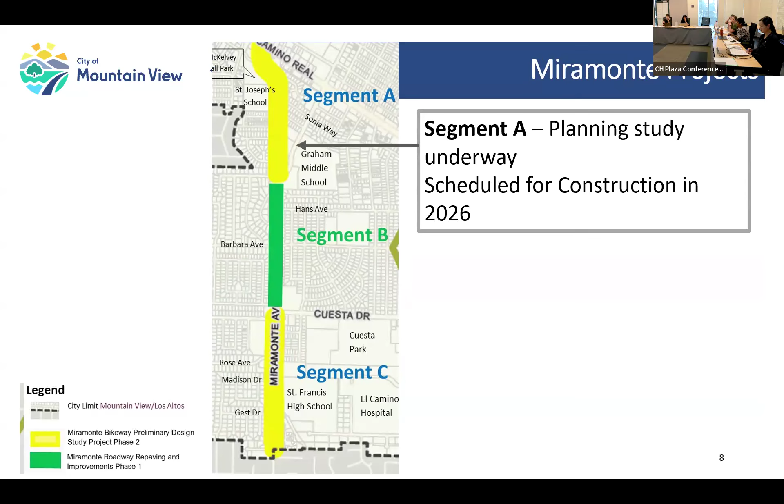As Allison mentioned, this is a planning study for segment A and segment C. We kicked off the study last fall with outreach round 1 and study data collection, which included a bike and walk audit, an interactive map survey, and an open house. Through this outreach we received valuable feedback and improvement ideas for this corridor.

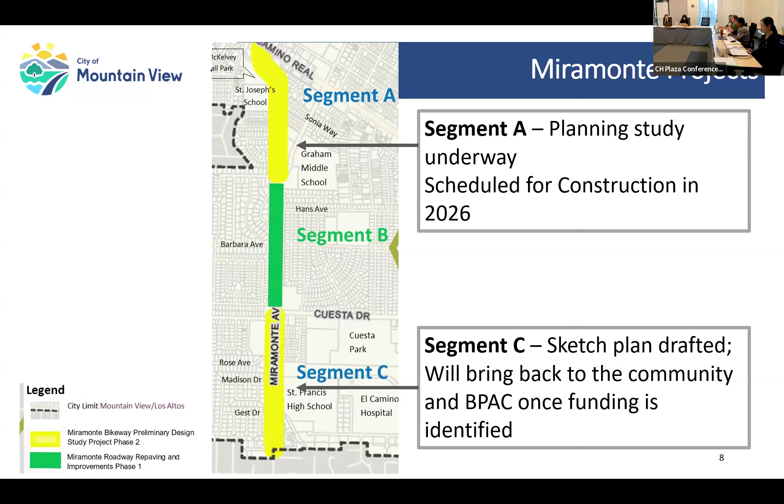In parallel, we also conducted thorough data collection, which included traffic counts, speed, traffic collisions, parking counts, and field observation. Traffic data collection and parking utilization are included in your packet as Attachment B and Attachment C.

Based on the data collection analysis, staff kicked off outreach round 2 during summer. During this round of outreach, staff sought feedback on proposed parking removal, proposed travel lane reduction, and bike and pedestrian facilities along the corridor. These elements were presented for public feedback.

Public outreach events included a study survey and pop-ups at nearby schools. The outreach notification included sending postcards to residents, car flyers, yard signs, traffic light pole flyers, and social media posts.

Through outreach, we heard support for protected bikeways and pedestrian safety features. In the survey that closed last Friday, over 55% of respondents supported this plan, and of the respondents who opposed the plan, preserving a travel lane was cited as the reason.

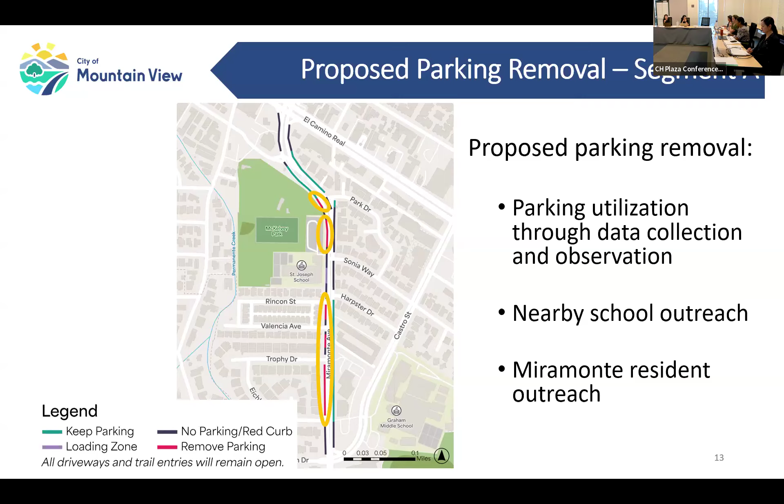The second element of the preferred concept plan is travel lane reduction from two lanes to one lane. This proposal is based on low traffic volume and delay analysis along this corridor, done using the Highway Capacity Manual 2000 methodology.

Approximately 64% of survey respondents supported the proposed and additional parking removal. Survey respondents also identified additional treatments, which included new and improved pedestrian crossings, traffic calming measures, and increased streetscaping and improved street lighting.

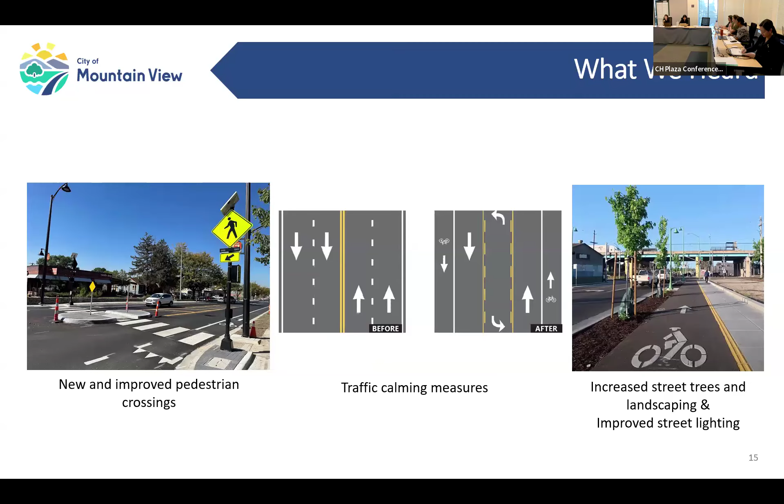This plan includes these treatments through mid-block crossings with rectangular rapid flashing beacons, signs, traffic calming measures through reduction of travel lanes, and barrier protected bikeways. This plan is also reserving space for a Green Street for the future if funding becomes available.

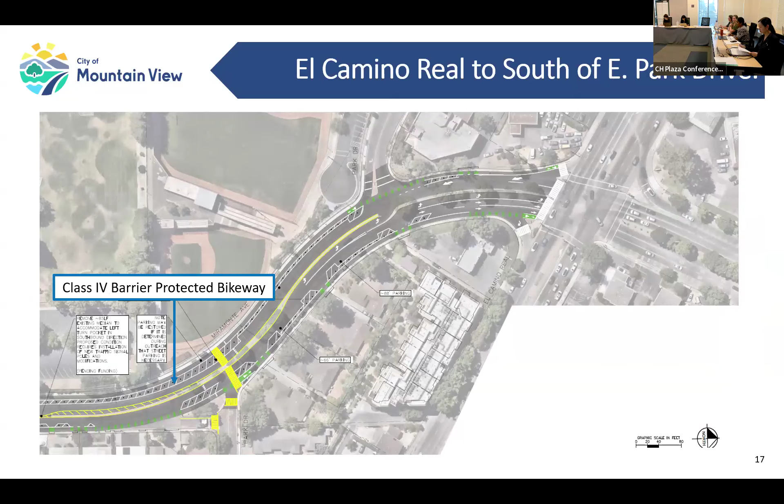Now to the preferred concept plan. This segment shows from El Camino to south of East Park Drive. As you can see, we have a barrier protected bikeway going southbound and a parking protected bikeway going northbound. We also have a mid-block crossing with RRFB and a dashed line through the conflict zone.

This segment shows from Park Drive to Trophy Drive. Again, on the west side of the street we have a barrier protected bikeway, and on the east side a parking protected bikeway. We have a high visibility crosswalk at Sonia and a mid-block crossing at Trophy Drive with RRFBs, and a green dashed line through the conflict zone.

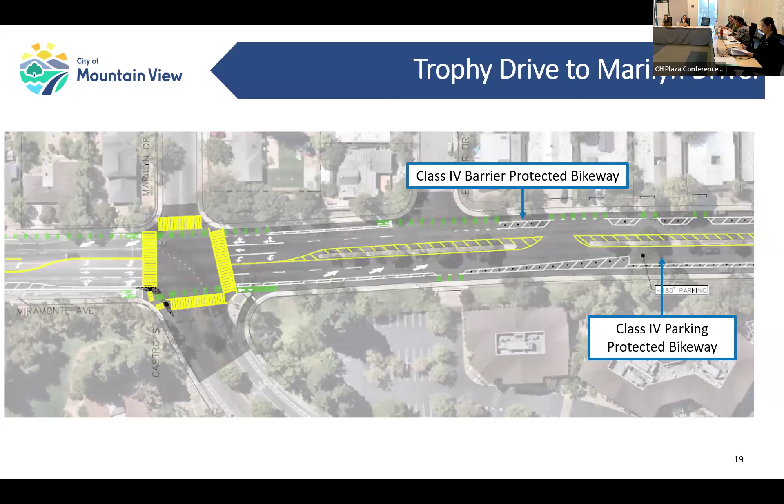The last segment is from Trophy to Marilyn Drive / Castro. We have a barrier protected bikeway, parking protected bikeway, high visibility crosswalk, and dashed lines through the conflict zones.

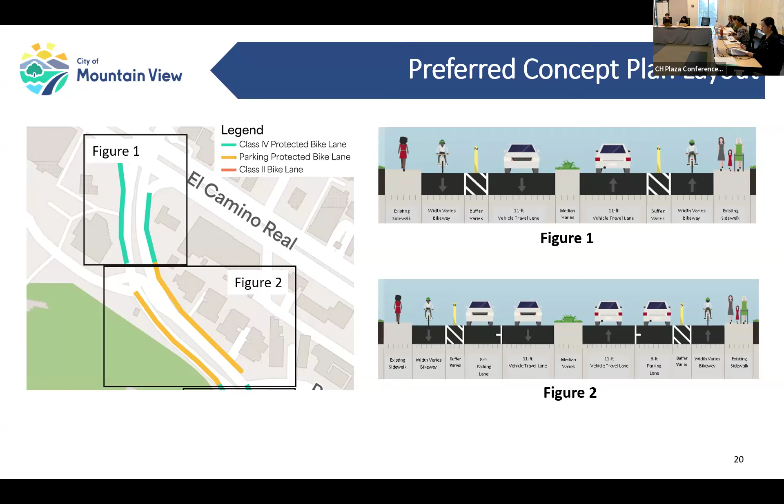To zoom in a bit more, one of the elements is the travel lane reduction. This map shows from ECR to Park Drive, where it will be vertical barrier protected and parking protected. The vehicle lane is 11 feet, and the buffer and bike lane would be determined in the design phase.

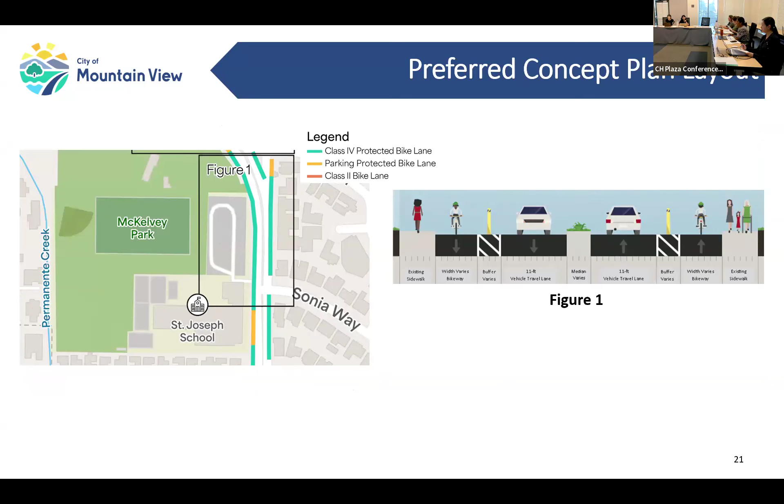This segment also shows Park to south of Sonia, where it is vertical barrier protected on both sides, and the vehicle lane is 11 feet with buffer and bike lane to be determined in the design phase.

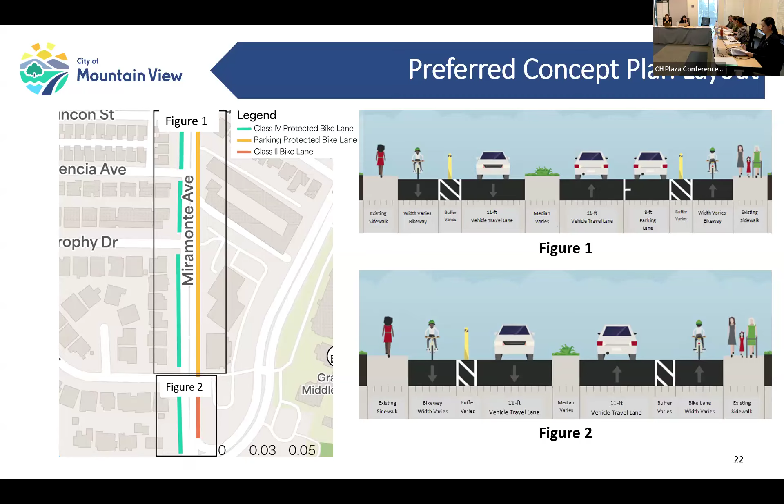And this is the last segment, showing from Rincon to Castro. It has parking protected and barrier protected configurations, and the vehicle lane would be 11 feet with buffer and bike lane to be determined in the design phase.

An alternative option to consider is keeping the existing bike lane configuration. In this configuration, parking is along the curb, then a bike lane, then a travel lane. This configuration would preserve 8 existing parking spaces compared to the preferred concept plan. The trade-off here would be that keeping parking would increase conflict points between bicyclists and drivers.

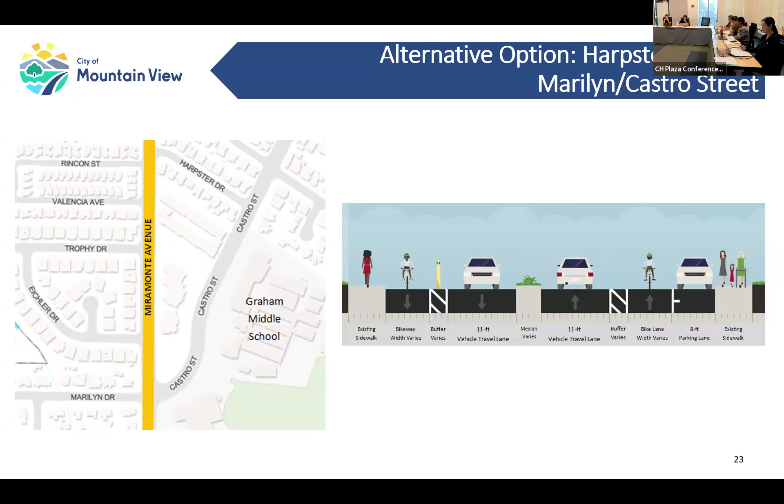So we went to BPAC last Wednesday, and we heard unanimously from BPAC that they also recommended this. They recommended the staff recommendation to CTC, and the motion passed unanimously.

The BPAC comments we heard were: explore loading area opportunities along the corridor, consider an additional mid-block crossing at El Camino Real and East Park Drive, consider a bi-directional bike lane from Miramonte Avenue to the maintenance alleyway at Miramonte and East Park Drive, located in front of the ballpark. Consider adding walkways along the corridor, adding crosswalks along the corridor, and restricting right turn on red. Explore shortening turn radii lengths where feasible to slow vehicles crossing the bike lane, and explore options to shorten and improve the merge transition between segment A and B for greater cohesion.

So what's coming next? We finished our community outreach in round 2 with a preferred alternative recommendation. From here, we'll move to going to council in fall 2025, and then the design team will kick off the design for segment A.

So the recommendation here before you is to review and recommend the preferred alternative concept plan for the Miramonte Avenue Complete Street Study, Project 2331, from El Camino Real to Castro Street, Marilyn Drive, Segment A, to City Council. Thank you, that's it.

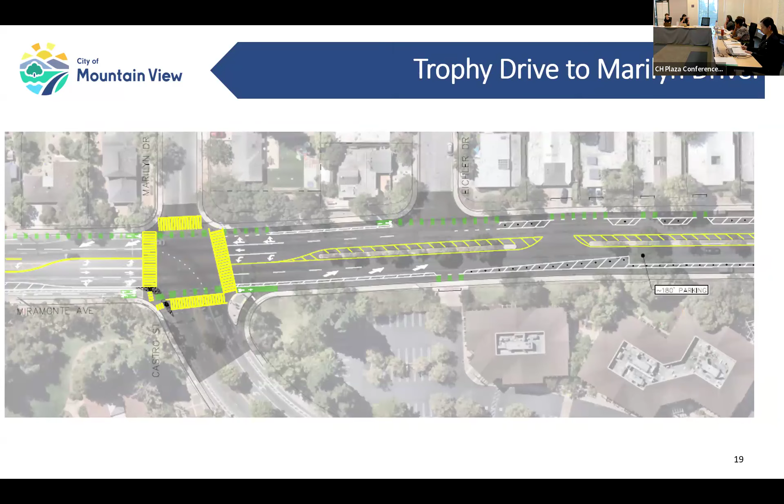Okay, and then a question about slide 19 related to high visibility crosswalks. When we do a high visibility crosswalk, I know that's kind of one measure, but we can also do high visibility crosswalks with flashing lights. So is that included when we say high visibility crosswalk, or is that another type of traffic analysis we have to do to include the flashing sign? Sorry, I don't know the technical terms.

RRFB, thank you. Our RRFBs are called out in specific locations, so we do have two of those included on the project. There's one between El Camino and Park, and then there's another one closer to...

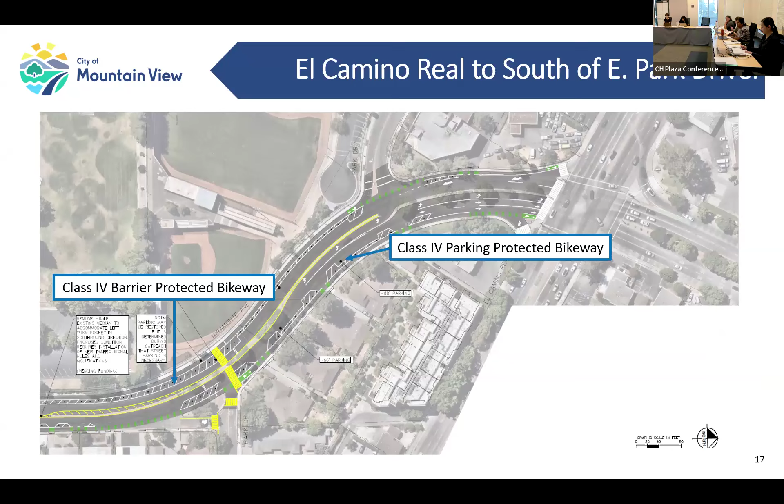On Trophy? Trophy, yeah, here we go. Sorry, it was hard for me to tell in the visuals. Yes, this one is with RRFB.

That would be a new one. And on Park, that's an existing one. We are going to put an RRFB there to increase visibility right here, at the mid-block crossings.

So at McKelvey, there's the mid-block. Yep, and you will install it there. Okay, because it doesn't exist from what I recall. Correct.

Okay, so there, and on Trophy, it will pop up right there, but not at Sonia. Sonia has a traffic light already, so it has a controlled pedestrian button. Okay, trying to orient myself.

Yeah, so the RRFBs are added usually for those mid-blocks where there's not a signal. Okay, great, thank you, those are my questions.

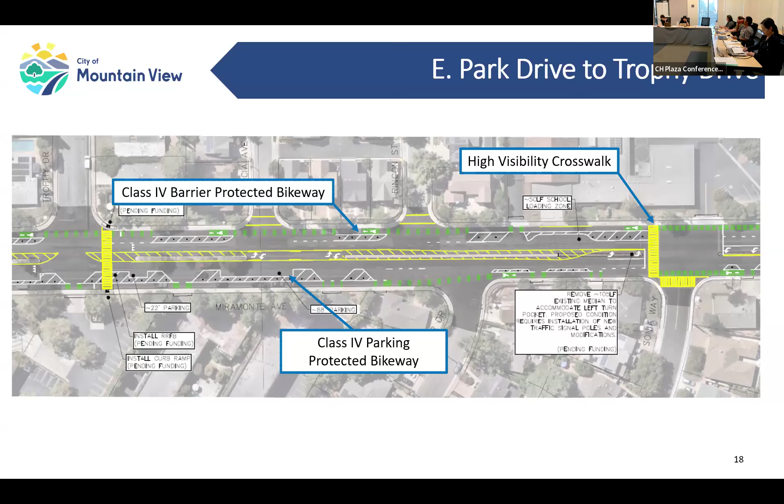Okay, those are helpful. So my questions are, first remind me, the BPAC comments, they did recommend the staff recommendation, and the additional comments they made, are they all explore and consider? Yeah, none that are definitely do.

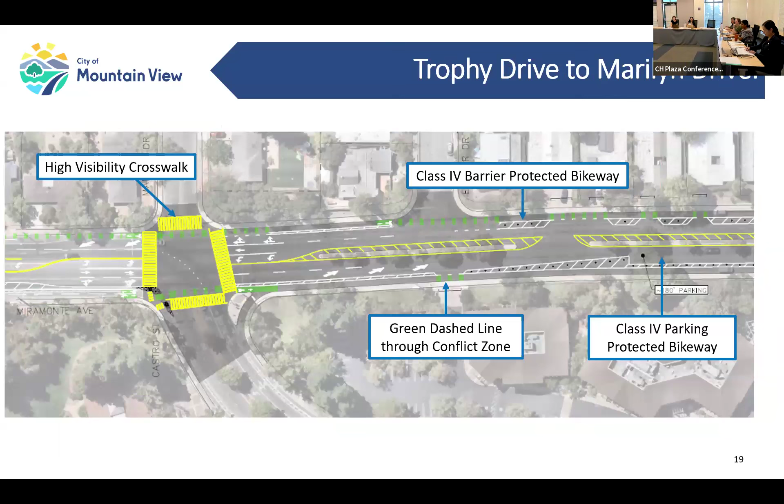Just wanted to make sure. And can you explain the bi-directional bikeway a little more to me, because I can't visualize it. Since it's just explore, I mean, we have to make sure the space is there, the more comfortable space, but I don't understand.

I don't know if your mouse will show up, but if you look to the right, going down the first baseline of the baseball diamond, there is an access road right there, we missed the driveway, so there will be an access point there. That was one of the comments we acknowledged, that yes, there needs to be an access there.

So the comment was between the new mid-block crossing with the RRFB and that access road, explore that the bike lane can go both ways, so people going northbound don't have to cross the street, they can just use their bike there. Correct.

So now we have to make sure that the space is there, and that's why we said explore, we'll look and see what's available. I'm glad I asked, because I didn't get that at all. So the idea was, if you wanted to go northbound, you would have to go south to get around.

Whereas if we did a bi-directional there, they could use the crosswalk, because people won't cross, and we want to direct them in a safe way. There was a fatality, I think, because somebody didn't want to cross, so making sure we have this space available in the right of way to do that. That makes sense to me.

That I endorse exploring it.

I should know this by now, but when I take this street, which I do a lot, traffic is very different depending on whether it's commute time or other times. So when do you do the traffic counts? We did it during morning and evening peak, from about 6:30 to 9 in the morning. Okay, good, so we captured the morning peaks.

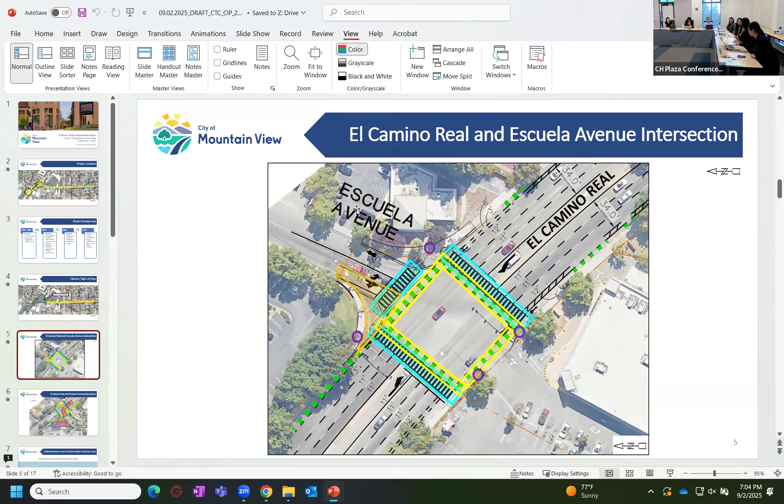I'll restart this slide, but we are going through the project scope in detail again, starting with the El Camino Real and Escuela Avenue intersection. At this intersection, this project will install high visibility crosswalks, green bike lane striping at conflict areas, and removal of the right turn only lane from Escuela onto El Camino with the installation of bulb outs and directional curb ramps. The intersection will also receive traffic signal upgrades, including conversion to an 8-phase traffic signal system, allowing protected left turns and eliminating pedestrian and vehicle conflicts.

The design for the intersection at El Monte Avenue will implement the feasibility study's recommendations, including high visibility crosswalks, green bike lane striping at conflict areas, maintaining 2 left turn lanes from westbound El Camino Real to southbound El Monte Avenue, and removal of the right turn slip lane from El Camino onto El Monte Avenue. Yeah, the slip lane, the free right turn.

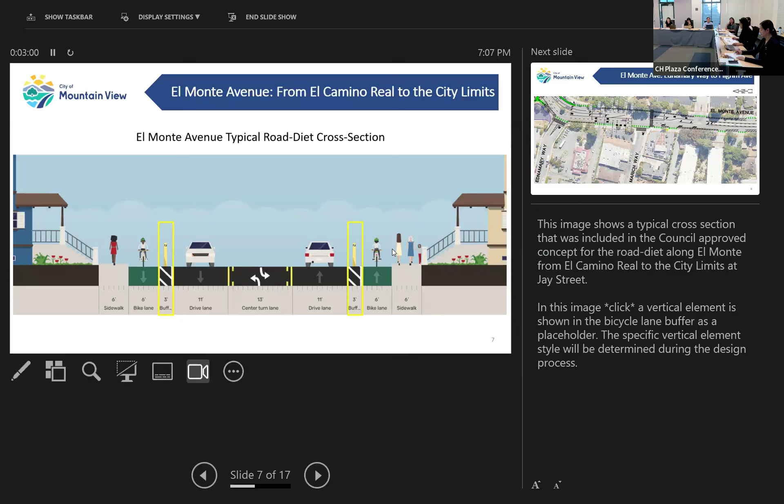This image shows a typical cross-section included in the council-approved concept for the road diet along El Monte Avenue from El Camino Real to the city limits at Jay Street. In this image, a vertical element shown in the bicycle lane buffer is shown as a placeholder. The specific vertical element style will be determined during the design process.

Now looking at the El Monte corridor between Ednamary and Pilgrim, the design includes the road diet beginning just south of Marich Way, buffered bicycle lanes on both sides, high visibility crosswalks, and in this section, a pedestrian refuge island. Between Pilgrim Avenue and Hollingsworth, the road diet will continue with green bike lane striping in conflict areas and high visibility crosswalks with pedestrian refuge islands at the intersection.

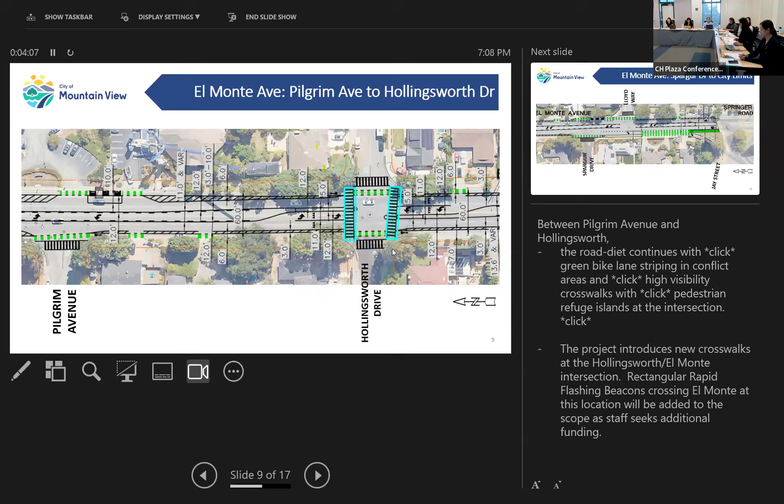The project introduces 2 new crosswalks at the Hollingsworth El Monte intersection. Rectangular rapid flashing beacons, also known as RRFBs, crossing El Monte at this location will be added to the scope, and staff will be seeking additional funding. Between Spargur and Springer Road, the road diet continues to the city limits, along with the green bike lanes and high visibility crosswalks.

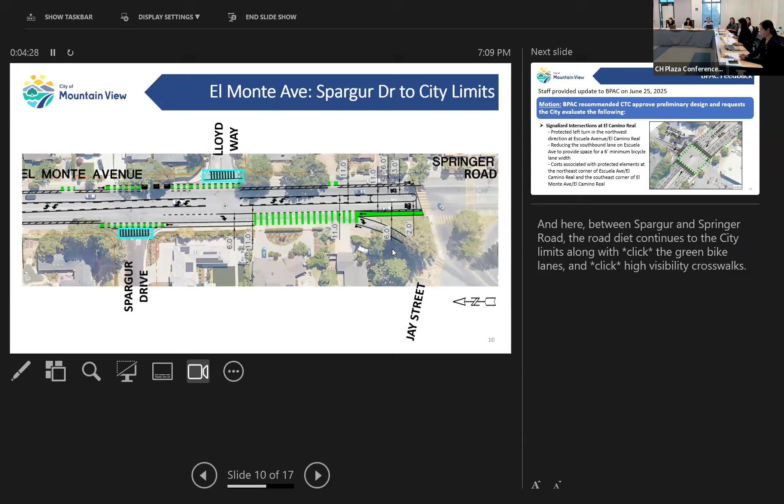The project was presented to BPAC this past June, and the committee provided the following motion for consideration. BPAC approved the preliminary design with recommendations for staff to look into: at the signalized intersections along El Camino Real, a protected left turn coming out of the commercial parking lot south of Escuela Avenue onto El Camino Real, reducing the southbound lane on Escuela to give more space to the bicycle lane width, and evaluating the cost for adding protected treatments on the northeast corner of Escuela Avenue, as well as the southeast corner of El Monte Avenue and El Camino Real.

On the El Monte corridor portion, BPAC's feedback included having staff evaluate the approach at Jay Street to reduce conflicts between vehicles and bicyclists. BPAC also recommended a speed study be performed after construction to identify any opportunities to reduce the posted speed limits.

Based on staff's initial assessment, staff will work on incorporating the elements highlighted here in green, particularly the westbound left turn on Escuela Avenue and El Camino Real, the conflict zone on El Monte towards Jay Street, and the speed survey after the improvements are constructed.

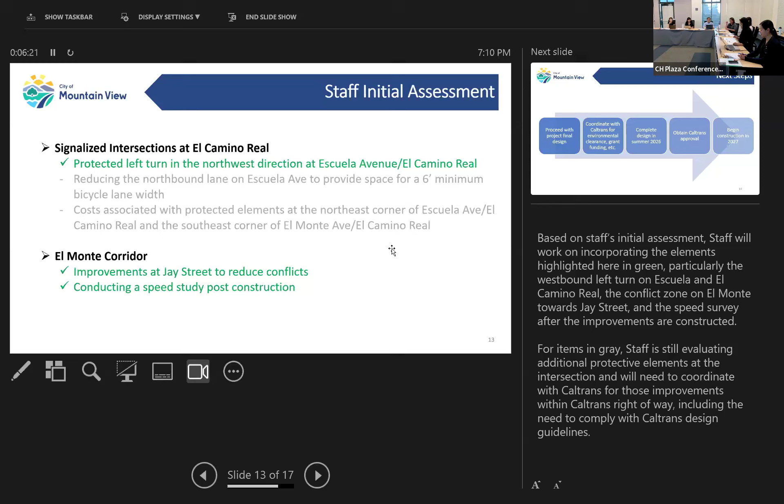Following this meeting, staff will evaluate the feedback obtained in both BPAC and CTC meetings and update the design accordingly. Staff will continue coordination with Caltrans as the design further develops.

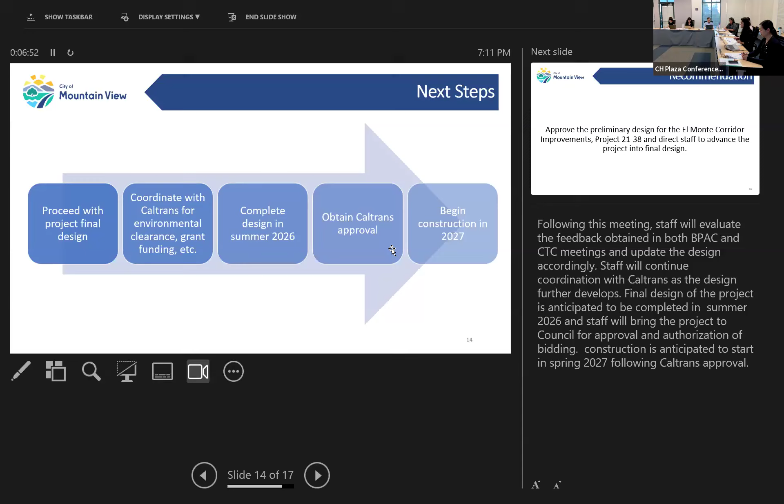Final design of the project is anticipated to be completed in summer 2026, and staff will bring the project to council for approval and authorization of bidding. Construction is anticipated to start in spring 2027 following Caltrans approval.

So tonight, staff has this recommendation for the commission's consideration. And that concludes the presentation.

So do we have questions from our committee members? Okay, I guess I'm going first.

Okay, first, what is, just like before on the bi-directional bike lane, what's a protected left turn for a bike? Oh, it wasn't for a bike? What's a protected left turn?

Protected left turns will have a designated lane for the vehicle. So it will be painted so that it's visible, the left turn. It'll have a left turn only marking, not signal. Okay, and protected just means that it's solely for that and visible.

If I can add, protected left turn for vehicle means that the left turning movement will get its own phase, so it gets a left green arrow rather than just a green ball that allows left turn movements and must yield to pedestrian. But with the protected left movement, it eliminates that conflict when pedestrians are in the crosswalk. I'm only familiar with the term protected in reference to bike lanes, with actual protections.

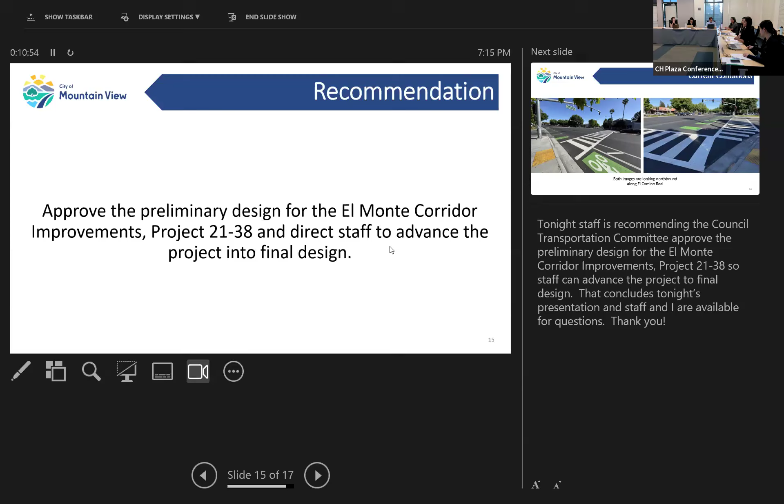So I have, thank you to staff. I know that, I was just trying to look back. I know that this is a very high conflict area, if not one of the most, right? The Escuela El Camino, if I remember correctly.

I was just trying to go back and realize, because I remember when we were doing the Vision Zero work, there was this brainstorm. I thought it was Escuela El Camino—am I remembering correctly? Can staff help me remember, there were different spots we were trying to challenge and address? Yeah, and this is one of them. It wasn't in this one, it may be just because it's one of the first protected intersections that we're working on along El Camino. We do have a lot more to follow this project, included in our 5-year CIP plan.

Robert Gonzalez, the principal civil engineer.

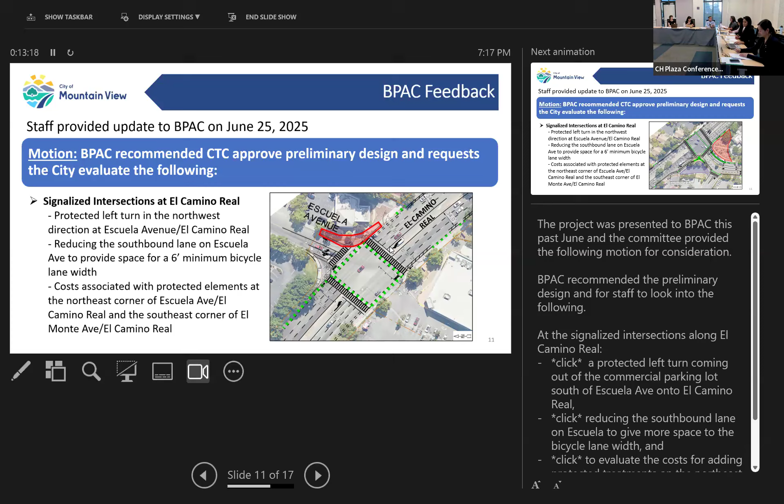So I saw too that it's the Caltrans right of way, and it looks like we're looking at those landscaping and green infrastructure areas. So kind of to Councilmember Hicks's comments about biodiversity and things, we could look at that as something, right? And it could be more than just a passive area, because I think it'd be pretty substantial once it's done. So is staff looking at that as like, I don't know if that's the right word, but kind of a placemaking opportunity or something?

Yes, definitely. Yes, more green stormwater infrastructure, and anything that creates some sort of sense of place for this location, just staff. It's a large area, so there's different opportunities.

Right, and I think that kind of dovetails into my next question, which is, I don't know if I want to say this in front of Councilmember McAllister, but is this like a public art opportunity perhaps, or are you thinking just green?

Just asking. I don't want to give you ideas. At this time, just greening.

Just greening. Okay, all right. It looks like our city engineer just wants to add. Hi, Ed Arango, Assistant Public Works Director.

Thank you for the question. As far as the public art policy, it's specific on the types of projects that qualify for public art, and it gives us some consistency for staff to know how to budget and plan for a project. So a roadway project like this doesn't fall within those categories. Okay, thank you, thank you. Those are my questions.

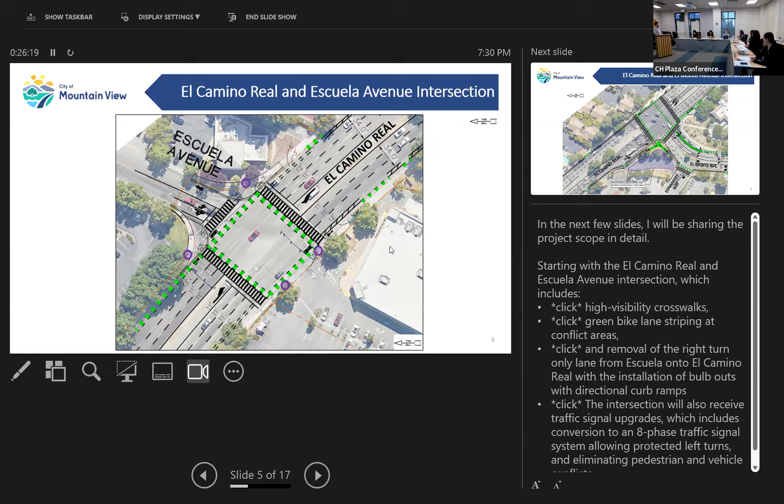Thank you. Could we find that slide showing the proposed road diet going into the parking lot? Right there, you see where the red ends? That's a right turn into the parking lot of the shopping center. So there's going to be congestion there. Were you aware of that? Why are you doing the road diet there and not further down past it, so there won't be conflict with people coming out or going in right there?

That's something we can take a look at. My understanding is this is the earliest point we could do this that allows cars to decelerate and merge into one lane from two. But I'm asking because I see a potential conflict with people slowing down to make the right turn, not paying attention, and bikes going through. That's a concern of mine.

Okay, now that's the context. Is the crosswalk at Marich Way being affected at all, in terms of the high visibility crosswalk? So it's a crosswalk right now, my understanding, but just a regular crosswalk, right? We're going to upgrade it with the ladder style, the high visibility we've been speaking about. Will there be lights there? I thought there were no lights there.

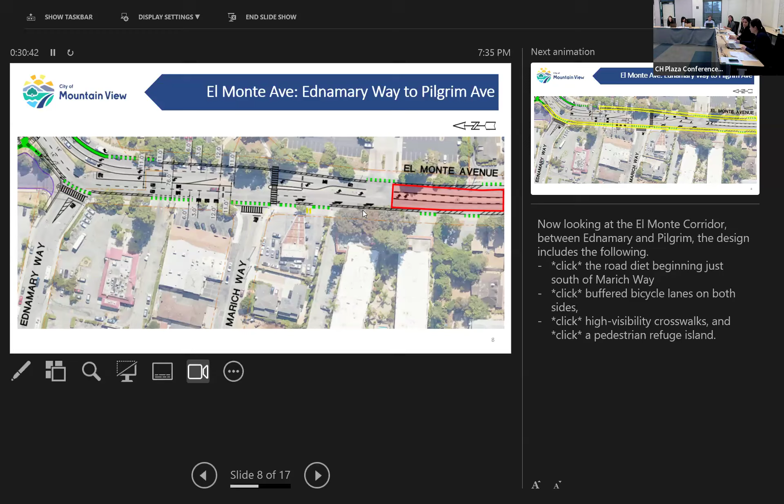Let's see what else I have in there. Okay, I think that answers my questions. Any other questions before anyone comes up with a second thought? No? Okay. Would any member of the public joining us virtually or in person like to provide comments on this item? If so, please click the raised hand button on Zoom or approach the lectern.

Okay, no one in person is coming forward. Is there anybody virtually? Yes. Celia Paymer. Oh, Sylvia, thank you. Yes.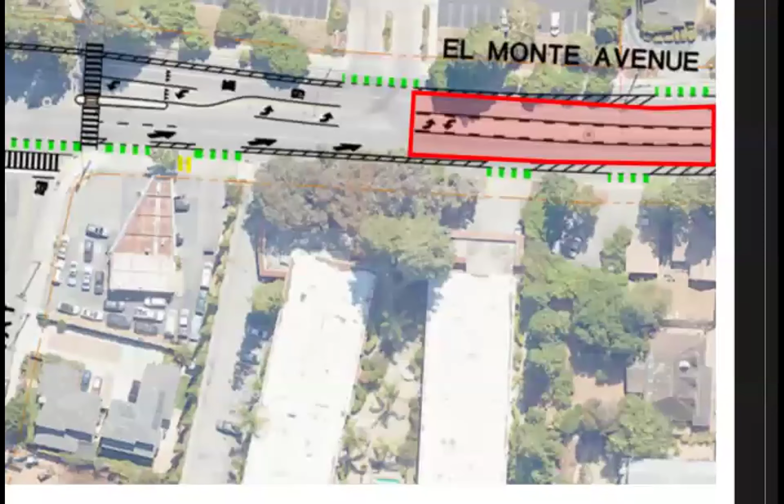Hi, thank you. I have a lot of comments, so I'll try to be quick. First off, the right turn on Escuela, I like the idea of the bulb out, but if you have it, please have a slip lane for the bikes. Otherwise, the bikes are forced into car traffic right at a point when everyone's looking around. So let's keep that conflict to a minimum and make sure there's still a lane there.

I'm not loving the options for bikes turning left onto or off of Escuela. Even when we hopefully add the no right turn on red, there are always conflicts for pedestrians and bikes with cars, even if they're going straight, because cars turn right into them on a green light. So I wonder if it's possible to look into a bike and pedestrian scramble cycle. Right now with the head start cycles already, we're adding 15 seconds now that we're having that protected left. So why not go to 30 and actually make it safe for bikes and pedestrians? We have 4 to 5 protected cycles for cars. Let's have one for bikes and pedestrians.

Then also, I really like the Hollingsworth crosswalks. Thank you for putting one on both sides, I love that. I do want to clarify: the slip lane from El Camino onto El Monte does have a light, but it's after the pedestrian crossing. It makes the cars stop for the oncoming cross traffic, not for pedestrians or bikes. So that does not increase safety.

In terms of the bike count, bike users tend not to show up when they feel like they're going to die. So it's sort of like saying, hey, there's a river between us and the town, no one ever goes to town, we don't need to build a bridge. We do need to build a bridge if we want people to actually go from our side of the river to the other, right? They need to not die on the way.

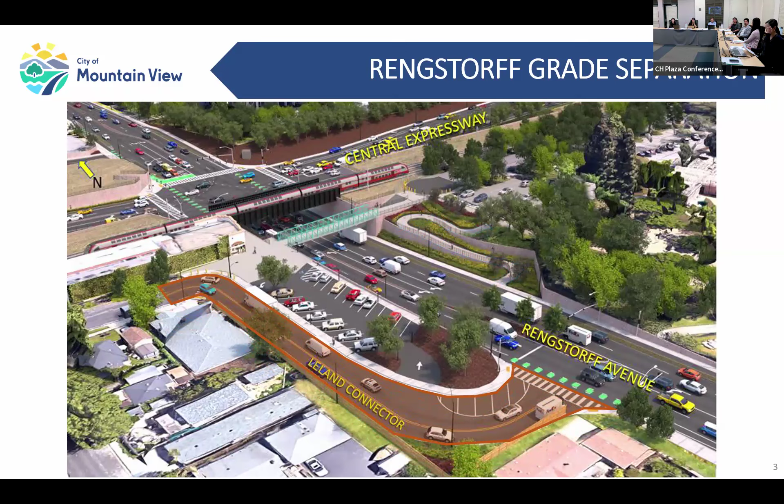And realignment of Leland Avenue and utilities connecting to Rengstorff to the south, which staff has been referring to as the Leland Connector, to maintain vehicular access to and from the La Plaza Market and the neighborhood on the west side of Rengstorff.

The Rengstorff Avenue grade separation started more than 2 decades ago as a feasibility study in 2004. The project has completed 35% design and is progressing to 65% design.

At the January 2024 council study session, staff shared a construction cost estimate of $242 million and a total project cost estimate of $325 million based on the 35% design plans. With the total cost of $325 million, the project was anticipated to have a funding shortfall of $31 million, which staff believe could be closed by pursuing grant funding opportunities.

In October 2024, the city received updated construction cost estimates for the project based on the 35% design plans from the contractor and a third-party cost estimator. These updates increased the estimated construction cost to $312 million and the total project cost to $453 million. Coupled with modest increases to other phases of the project, the anticipated funding shortfall increased to $159 million. Staff analysis revealed that the earlier estimate underestimated the construction costs and did not include the necessary contingencies at that stage of the design.

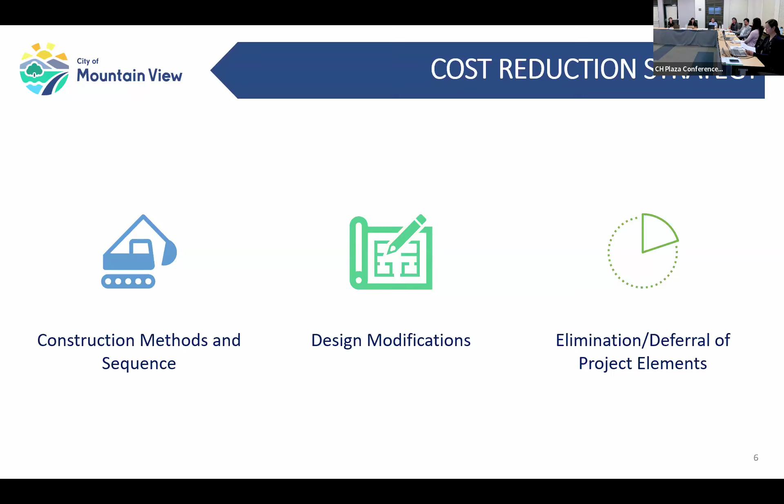The estimated cost saving for each option is preliminary and will require more detailed work to determine actual cost savings. For this reason, the cost savings shown in tonight's presentation should be considered as a rough order of magnitude rather than definitive numbers.

The first category of cost reduction strategy is construction methods and sequence. The design team has evaluated adjustments, including construction staging, roadway pavement section, sanitary sewer relocation, and single track shoe fly.

A shoe fly is a temporary rail line used to bypass a construction site, allowing trains to continue operations while the main track is being repaired or replaced. A single track shoe fly is one rail that will serve both directions, allowing only one direction to proceed at a time, temporarily affecting rail service and potentially ridership.

The total potential savings from this category is $18.4 million. However, as the single track shoe fly was found infeasible by Caltrain, the potential cost savings that can be realized in this category is approximately $14 million.

The second category of the cost reduction strategy is design modifications. Various design alternatives have been evaluated to determine potential cost savings, and we recognize that these cost-saving options require thoughtful consideration and deliberation as they will affect the user's experience.

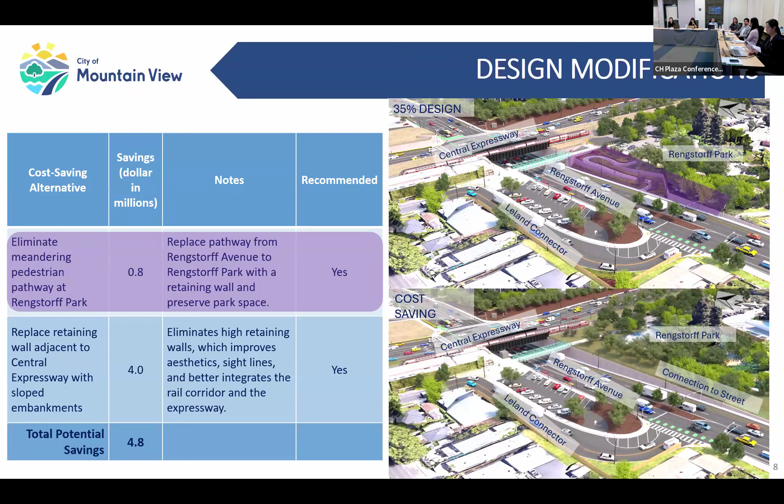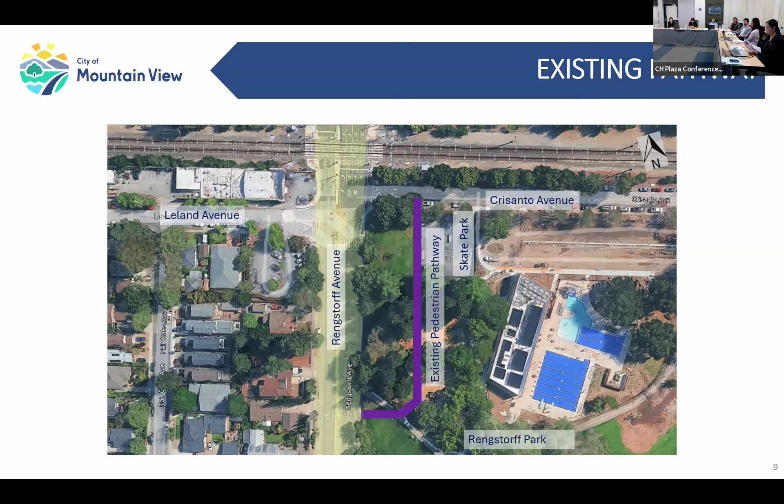As mentioned previously, the elimination of the meandering pathway from Crisanto to the lower Rengstorff Avenue is the practical cost-saving alternative, as there is an existing pathway shown in purple from Crisanto Avenue adjacent to the skate park that connects to Rengstorff Avenue. This existing pathway will be slightly modified to meet the future lower Rengstorff Avenue.

Another cost reduction option is replacing the retaining wall adjacent to Central Expressway with sloped embankments. The 35% design included retaining walls up to 22 feet in height along the Caltrain right-of-way and Central Expressway to provide space initially expected for additional rail lines for a future double tracking by Caltrain. Caltrain determined that the double tracking at Rengstorff is no longer required and the walls can be modified with slope embankments. This design change would result in potential cost savings of approximately $4 million.

The potential cost savings in the design modification category is $4.8 million.

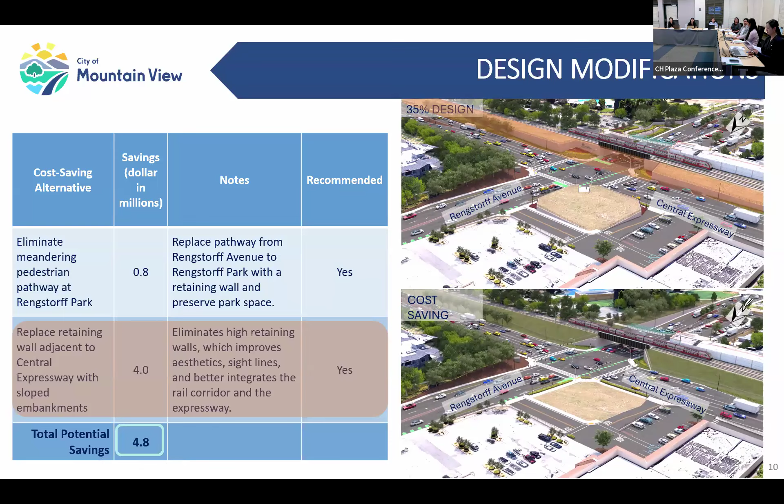The third cost reduction strategy is elimination or deferral of project elements. Further near-term cost reductions can be realized by reducing the project scope and deferring elements that could be constructed by the city in future phases.

One project element that can be eliminated and deferred as a future project is the retaining wall at the gas station, as it is feasible for the gas station to remain with the proposed lowering of Rengstorff Avenue and Central Expressway intersection. This property will need to be acquired for the project.

Use for this parcel remains undetermined, and deferring the construction of the walls and stairs at this property can result in a potential cost savings of 1.3 million. The city or future developer can construct and regrade the site in the future when the use for the property is determined.

Another element that can be eliminated from the scope and deferred as a future project is the bicycle pedestrian bridge. This bridge connects Crisanto Avenue and Rengstorff Park to the La Plaza Market and the neighborhood on the west side of Rengstorff Avenue. Deferring construction of this bridge and stairway can result in a cost savings of approximately 2 million. The potential cost savings from this category is approximately 3.3 million.

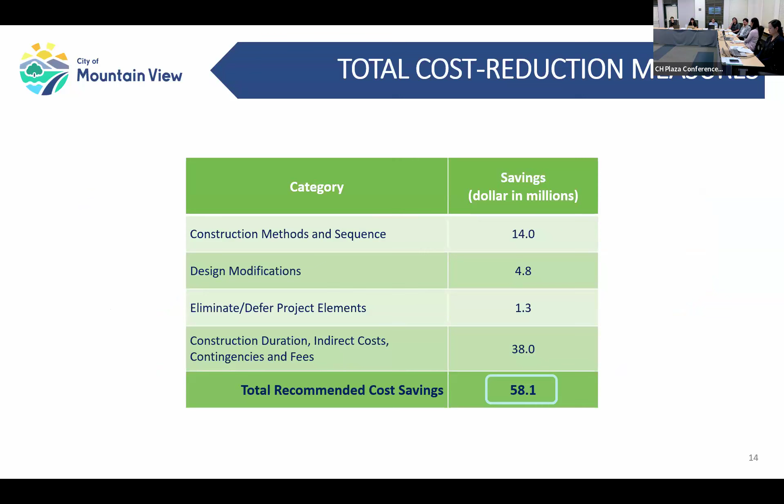The total savings of 58.1 million reduces the project cost from 453 to 395 million. A total of 296 million in funding has been secured or is anticipated, resulting in a new project shortfall of 99 million if the city council approves the recommended cost reduction measures.

The greatest risk of rising project costs is delay, with estimates showing an annual increase of 9 to 14 million if full construction begins after 2027.

While final design and right-of-way acquisition are fully funded and will take 18 to 24 months, the city can reduce cost escalation by progressing with these phases while securing additional funding. Additionally, early construction of certain components, such as utility relocations and the Leland Avenue realignment, can help mitigate cost increases and keep the project on track for full construction.

Staff will continue collaborating with the project team to explore cost-saving measures during the design phase and will present recommendations to council for approval in fall 2025 before fully proceeding into 65%.

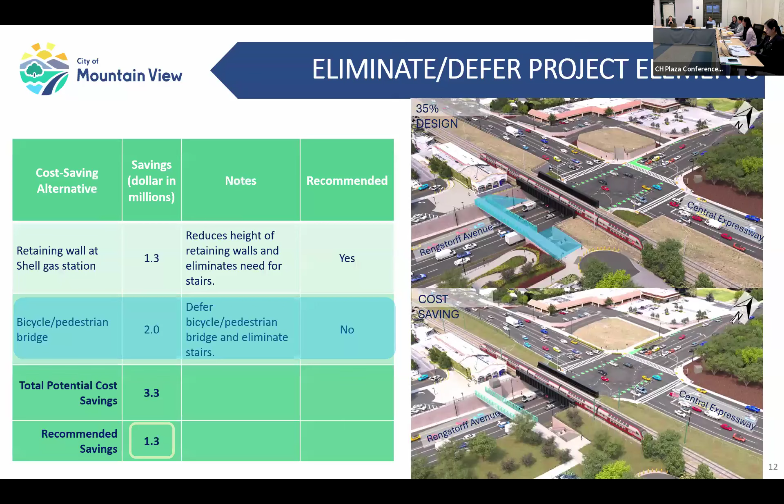If you're ready, I can let you talk and I can follow up. Or... I'm ready to move stuff. Oh, okay, then I'll talk.

Sorry. I may not have a slide that shows it, you can just point at it. So in terms of right-of-way acquisition, we have a list of partial and full takes that we need to acquire as part of this project. And so we've strategically worked out with VTA and with our partners at Caltrans. Which one?

Spam call. Oh, it's somebody from Mountain View called. Oh, okay, where'd that go? Hello? Goodbye. Yes, sorry about that.

Okay, done, that's the first thing. So 134 is where the Leland Connector, the future Leland Connector, will connect that to Rengstorff. So some homes are being taken out? The house, a residential property has been purchased, correct. Okay, because I know that, okay.

And other than the Shell station, is there any other property that needs to be bought? Yes, as I was mentioning, we have a list of partial and full takes. The Shell is probably the most prominent full take that we need to negotiate, so we begin with those willing sellers. The La Plaza Market is the other one that is predominant here, where we would be modifying their parking lot substantially, like taking it away for a time and then replacing it in kind. So that takes effort, that takes design, that takes some planning to do. So that would be another one that we need to strategize.

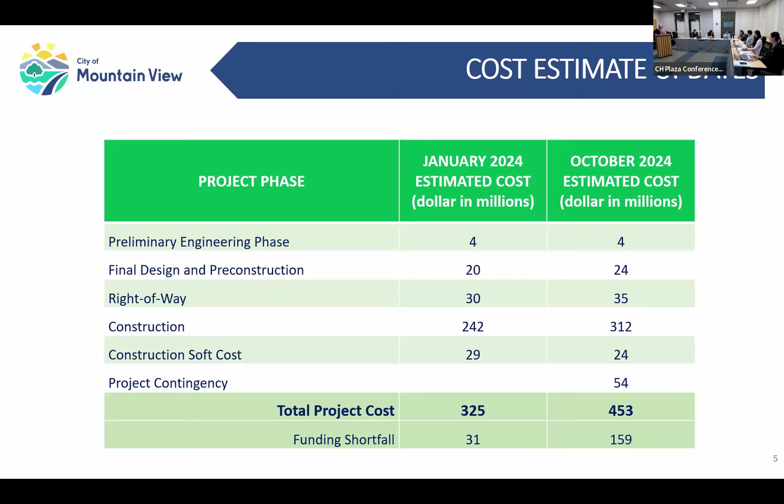I'll cut to the chase a bit for you, Mayor. So the one question I have is on the pedestrian bridge, or the connection across. Can you bring up that diagram for me?

Okay, so the thing, the one in purple - how much is that? $2 million? Okay, so how much further down does that get us to, so it says Rengstorff...

There, you gotta cross it. The signal - how far is that bridge to the signal that turns into the community center? I'd say it's several hundred feet. So it's 300 perhaps. Okay, so to have people go another 300 feet, potentially, instead of putting that bridge in...

There, and how many people? Is that potentially gonna serve just that community? So people crossing it, they're just gonna go into that community?

So we know that there is a lot of movement between the areas east of Rengstorff and west of Rengstorff, accessing the La Plaza Market as well as going to and from the 2 communities. So some of that is accessed via Stanford, but a lot of it is accessed through the park. So if you're at the park, you see a lot of people with bags from the market. You see a lot of people moving to the market, young families, like older folks.

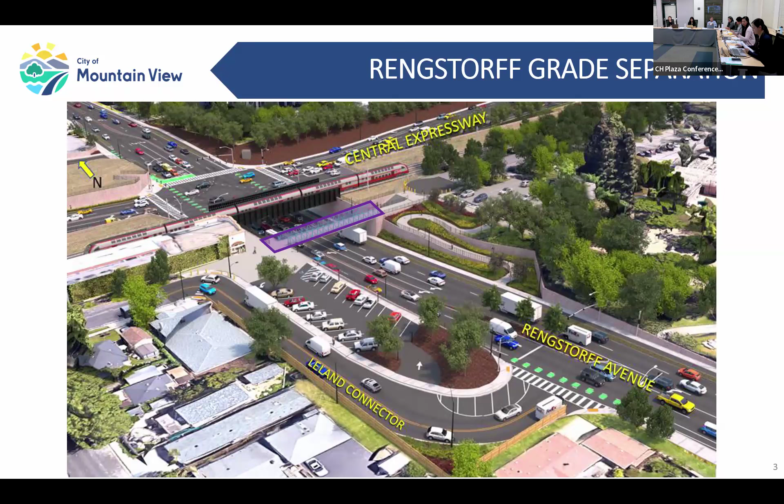Okay, I think I've conveyed my thoughts, so we can go to virtual. Or anybody in house would like any comment? Anybody here discuss? No. Anybody virtual would like to ask any questions? No raised hands.

Okay, then we will bring it back to the committee for comments, motions. I think you made the motion, it's been seconded. Make a motion to accept them. It's better than it did before.

I again will vote no, because I would like to see something much more aggressive, not necessarily what you're cutting, I'd rather see some numbers, dollars, inflation, realistic things. Because it's very hard for me to see something that I know was 150 at one time, and it's gone up to here. And if we want to get it done, we really got to nail down our funding. And that's always out of our control. We're at the mercy of many.

Okay, it's a 2-1 vote. So the motion passes. Would you like to take an official vote? Although we raised your hands. 2 for, and 1 against. Not against the project, just I need more detail.

I want this project to go because it's our only realistic thoroughfare, to get people going north-south through the city, for all the other people coming through. And the grade separation at Castro is just way too much.